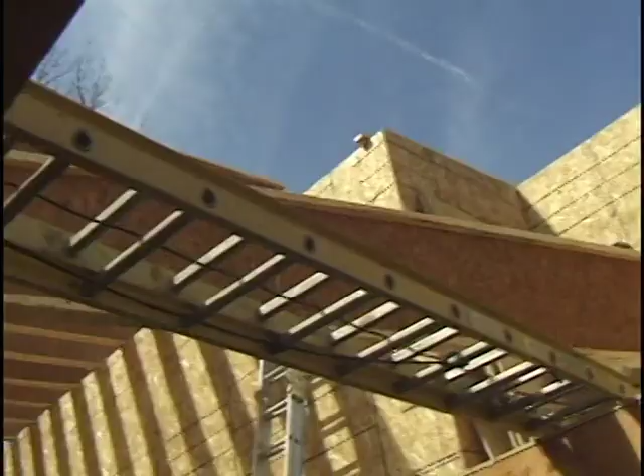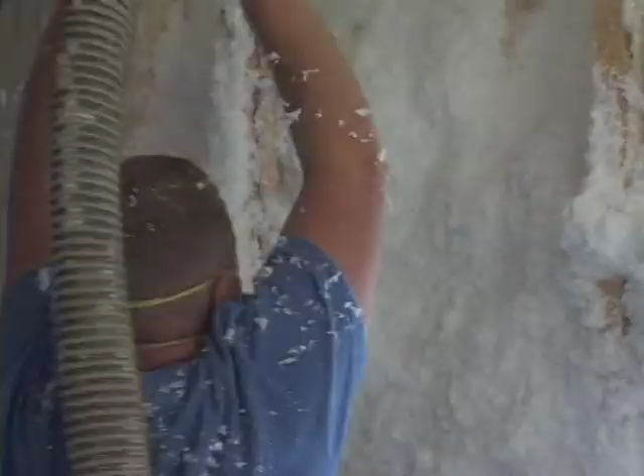The story of a new way to build that uses 80 to 90% less heating and cooling energy. It's called Passivhaus because the buildings are so well insulated and airtight that they don't require an active heating system, like a forced air furnace or a heat pump. This house is going to cost $100 a year to heat and cool. I think that's a pretty powerful statement.

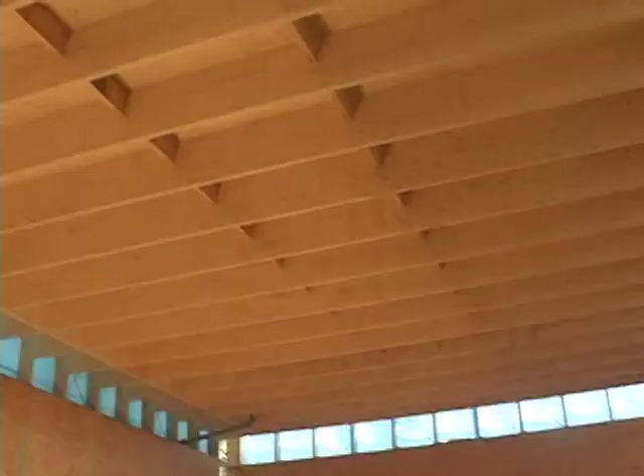This technology was invented in North America during the first energy crisis by innovative people who were trying to make significant cuts in energy use. A famous physicist named William Shurcliff very early saw that the hugest potential is just in using the energy we have much more efficiently. Today, our problems are much more serious than they were in the 70s and 80s. Climate scientists tell us that we must cut our CO2 emissions 80% by 2050 to help stabilize the planet's climate. And that means drastically cutting our energy use.

There is a deep analysis of the International Energy Agency about the current situation, and they just state that the current energy situation in the world is blatantly unsustainable. We absolutely need to transform the way we use energy.

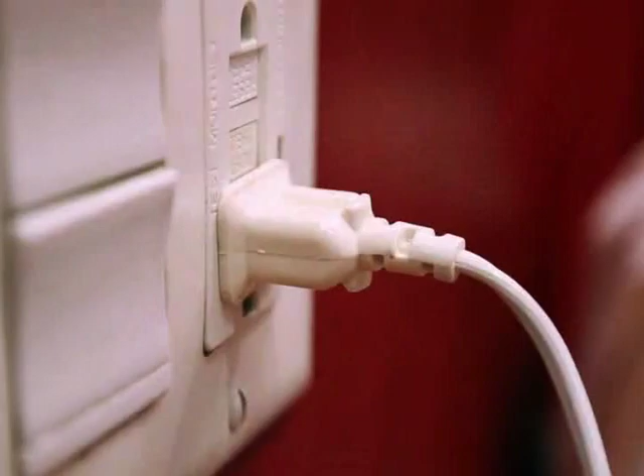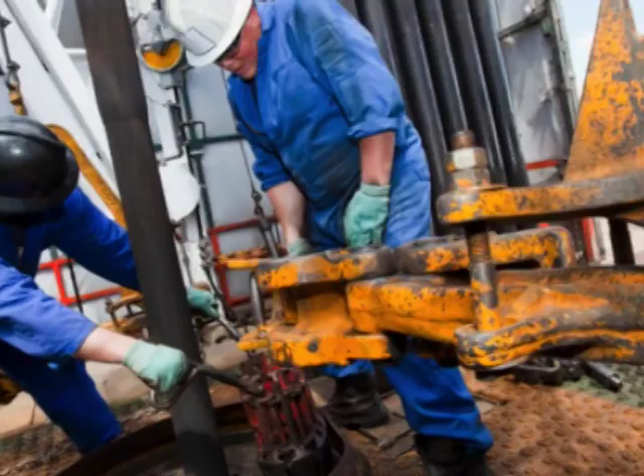What happens when you pass that peak and you change the relationship of supply and demand, and you're on the downhill slope? The fact that we are going to the limits of fracking to get shale oil out of North Dakota and Texas, that we're performing mining operations in Canada to dig out oil sands and process them with natural gas inputs to make a liquid fuel. These are signs that we are really hitting scarcity.

The CO2 emissions that we're personally responsible for don't just go away, they're actually accumulating. The notion that I was, just through casual energy use, producing CO2 that will still be there in 25 years and 50 years, that my grandkids will be dealing with the stuff that I just casually put out there. We will need to know how, by the middle of the century, to reduce carbon emissions by 80 or 90%.

We're able to tell now, I think 2010 was the warmest year on record. If the worst case occurs, then large parts of the planet may be uninhabitable. We may have flooding on the coast.

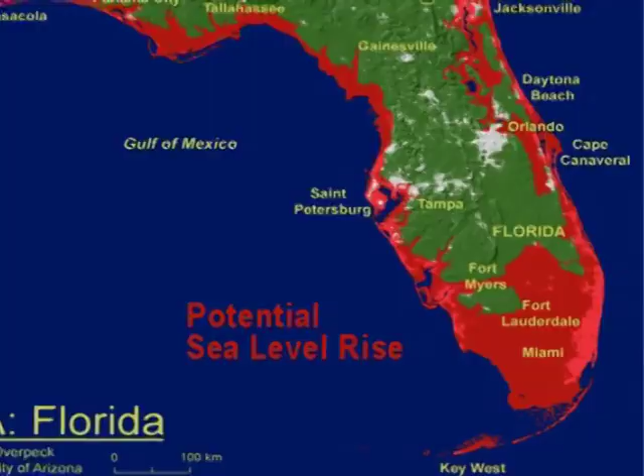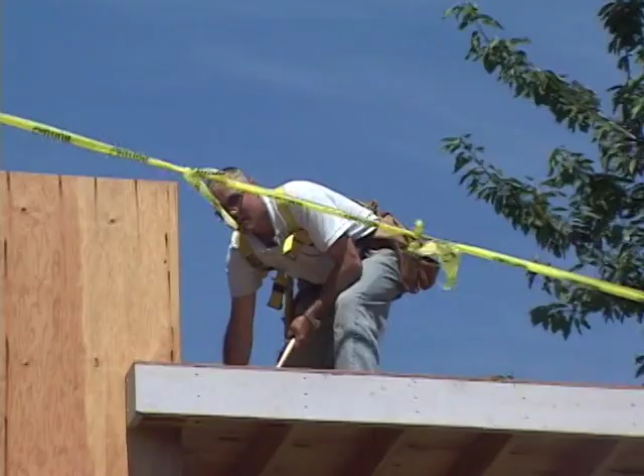It's going to require an effort that's certainly equivalent to what we would call a wartime effort. And it's going to require the citizenry to accept that this is very important and really see this as a survival question. And we have to change it quite quickly. In energy terms, quite quickly means in the next 20 to 30 years. 20 to 30 years is a short time compared with the development of buildings, compared with the development of power plants. The International Energy Agency speaks about an energy revolution as what is needed.

Our housing designs in the U.S. rely on power, electricity, and the burning of fossil fuels. If we did not have easy, uninterrupted access to these fossil fuels, I think a lot of our housing would not serve its main purpose, which is to shelter people. Almost 50% of our CO2 in the United States is generated from buildings, either from building them, tearing them down, or living in them. Buildings generate more CO2 than cars, trucks, and airplanes, and once constructed, last many more decades.

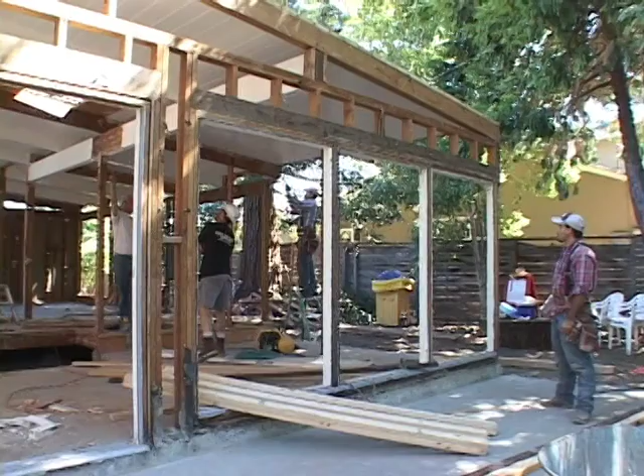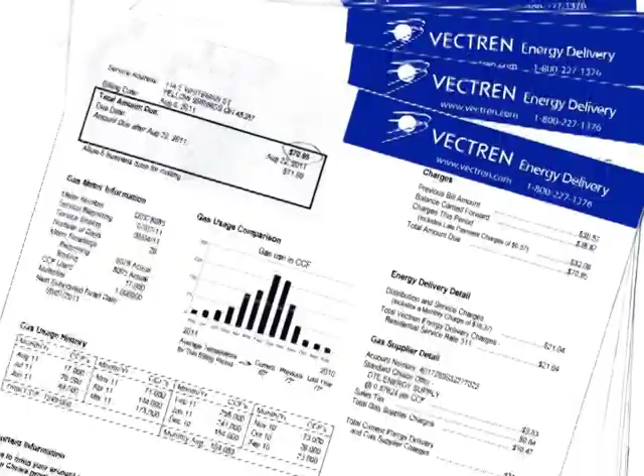The longer it takes us to realize that we have no alternative to making huge improvements in how we build, the less time we will have to do a good job in that transition. Forget about points, forget about green ratings. How much energy did the building use last year? Let's look at the utility bills. As soon as last year's energy bills for a building become a normal part of a real estate broker's listing, people will have a tremendous financial incentive to make their buildings energy efficient.

There was a very early development of energy efficient architecture in the 70s. In America there were a lot of good examples showing that you can have a better efficiency of, say, a factor 3, a factor 4, and that there are almost no limits on how high the efficiency can be. The first super insulation projects came out of Champaign-Urbana, out of the Small Homes Council. Wayne Schick apparently coined the term super insulation. These developments ended somewhere around the mid 80s. It was very difficult to understand why these developments stopped.

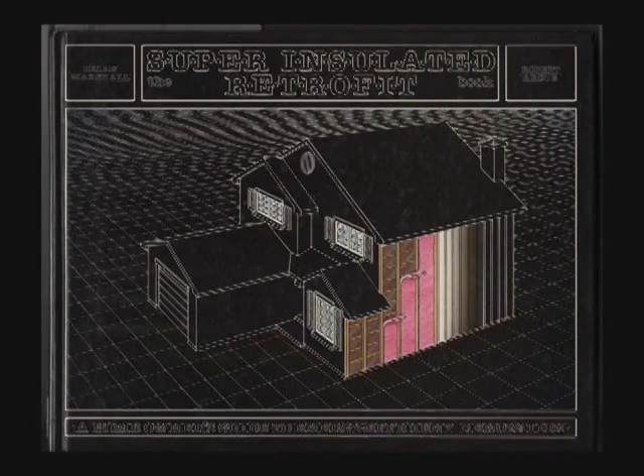And that's when, in Germany, Dr. Feist and Professor Bo Adamson went ahead and studied all these concepts. They had studied William Shurcliff, they had studied all the early super insulation books, they had studied Amory Lovins's work. They took the whole thing and really engineered it from top to bottom. We really proved that this strategy is successful. In 2003, Katrin Klingenberg built the first prototype passive house in the U.S. in Urbana, Illinois.

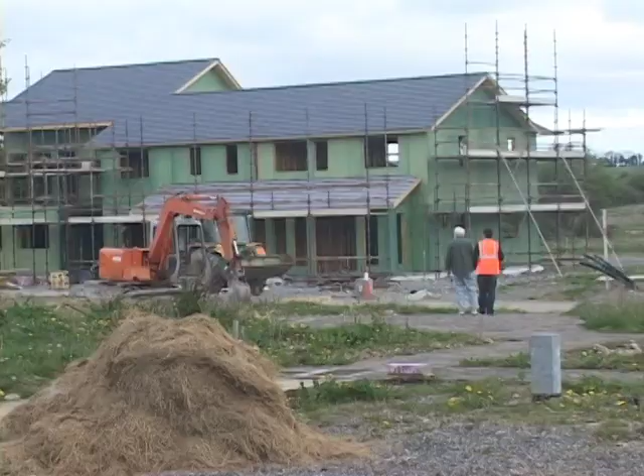Kat and builder Mike Kernagis then began the Passive House Institute U.S. Europe has been setting an incredible example in terms of making subsidies available, understanding that also this new building sector is creating jobs, putting new codes in place that require building construction to comply with Passive House standard. And the European Parliament has put into place an action plan that is working towards making Passive House standard code for the entire European Union by 2015.

Europeans and people living in other developed countries generate less than half the CO2 each year as people in North America. Traditionally, Europeans live in smaller houses, but there is also a growing commitment to renewable energy and the passive house as the building standard. What is not so well known is that you can reduce it not just by 10% or 20%, but you can reduce it by 80% and 90%. So this is a real solution available.

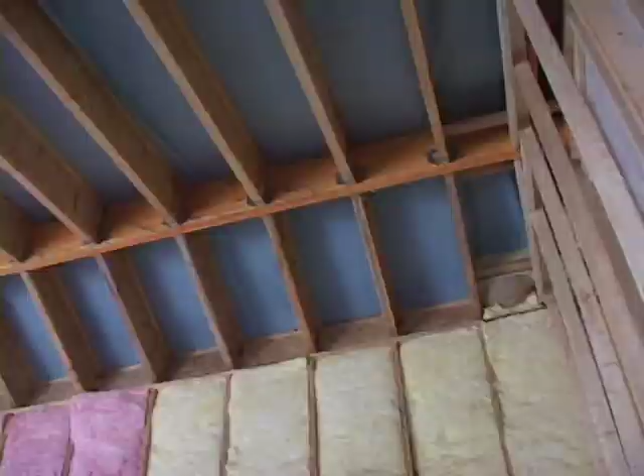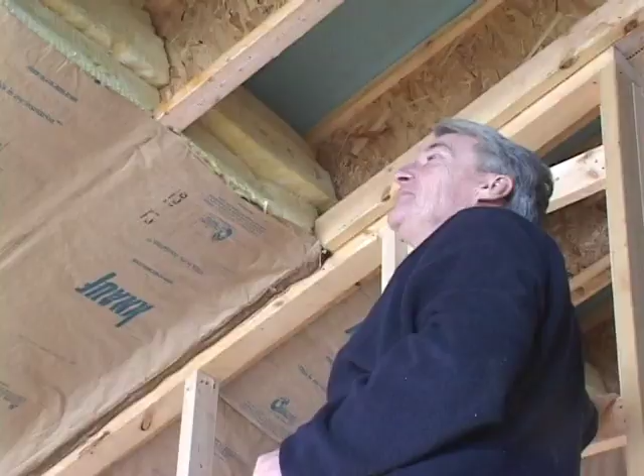This building standard is achieved by making the entire building envelope, the walls, floor, and ceiling, thicker than usual, so it can hold more insulation. So we're using I-joists that are 16 inches deep. So in the 16 inches, we can put in 3 layers of this high-density fiberglass. Holes where wires, plumbing, and vent pipes enter the building are sealed, and the house is made as airtight as possible.

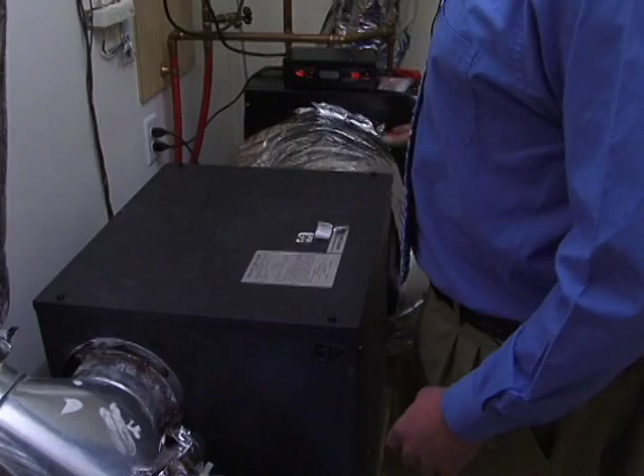Heat or energy recovery ventilators are used to provide fresh air, transferring heat from the exhaust air to the fresh air entering the building. We have the air coming in that's cold from outside, and then we have the warm air on this side coming from the house, extracted from the kitchen. The constant ventilation ensures good indoor air quality.

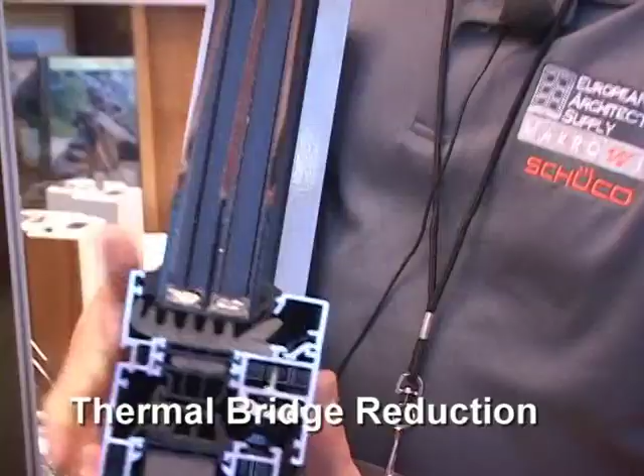High-performance doors and windows are also installed. Such windows are typically triple-paned and filled with argon or krypton gas. This is a Passive House certified window. The thermal break in between is really the key to stopping the energy transfer from the exterior to the interior or vice versa. All material conducts energy, some more slowly than others.

For example, metal and brick conduct energy more easily than wood, which is a better conductor than insulation. Thus, a metal window frame, or a solid framing member in a wall, becomes a thermal conductor of heat or cold between the inside of the building and the outside. In a normal building, this would usually be a thermal bridge where you have a transfer of masonry through the building into another masonry wall.

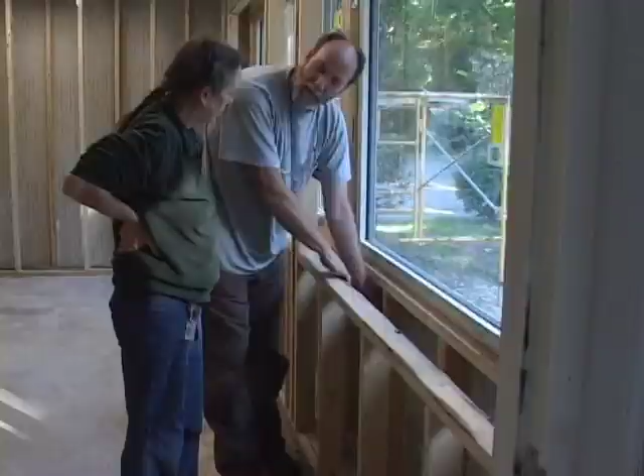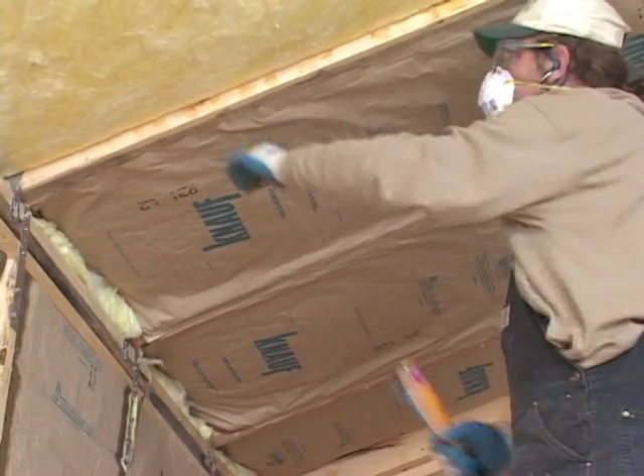This stone is a skin. There's lots and lots of insulation back there. So we've reached this traditional look with extremely modern energy efficiency. And if you calculate the heat loss... The misconception that the public has is that there's going to be one thing that changes the way that we do it. Each area is going to have a small savings, and added all together, it's going to be a very large savings.

The term passive house refers to buildings that are so well insulated and sealed that they no longer need a conventional heating and cooling system. Passive house construction is different than passive solar. Passive solar buildings were designed to collect energy from the sun using large areas of south-facing glass, often causing overheating during the day and cooling off at night.

Instead, during the winter, passive house buildings rely on keeping in the heat that is naturally present in a building from the sun, people, TVs, computers, and other appliances. And in the summer, south-facing windows are either shuttered or shaded to eliminate solar heat gain, greatly reducing the need for cooling.

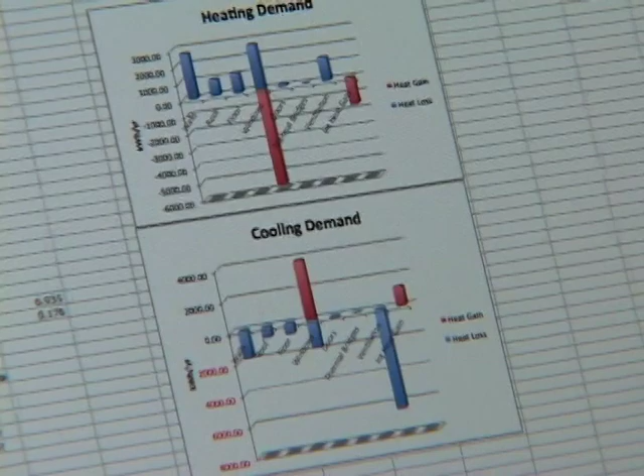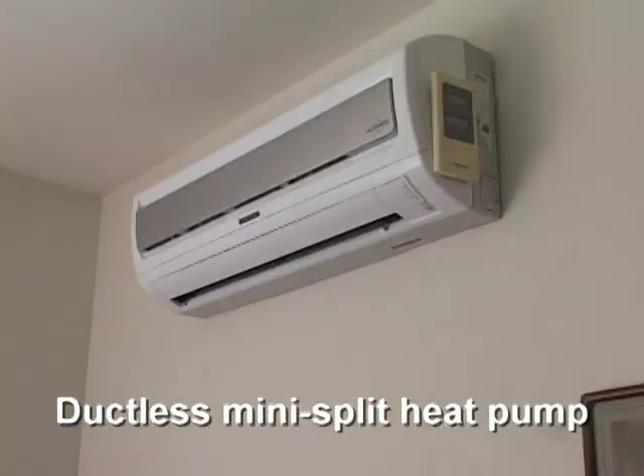Solar orientation is really important when you are working with the Passive House planning package and trying to achieve a passive house. It shows you on a couple of different spreadsheets how much of your heating demand is going to be met by the sun and how much of it you then have to make up for with mechanical means. In most climates, all a passive house needs is a small backup heating or air conditioning system, such as a mini-split heat pump, for extremes of hot and cold weather.

The Passive House standard requires that buildings use no more than 15 kilowatt hours per square meter of living space per year for heating and cooling. 15 kilowatts is similar to the amount of energy used by a hairdryer or a small space heater.

Building very low energy buildings requires the use of energy modeling software. The heart of the design process with Passive House is using the Passive House Planning Package, or PHPP, that was developed by the Passive House Institute in Germany, that allows you to do energy modeling of the building and also is quite good for optimization and design.

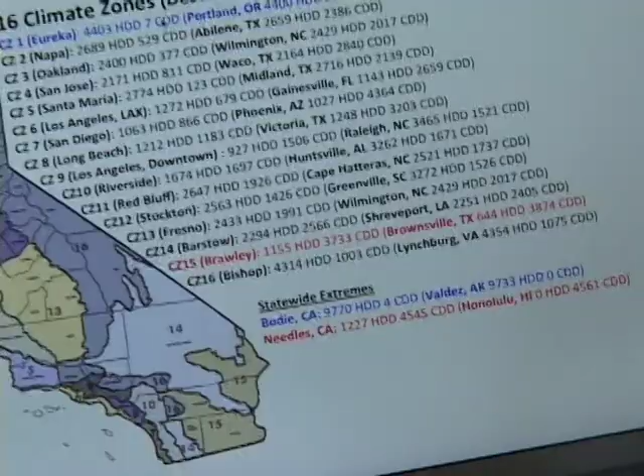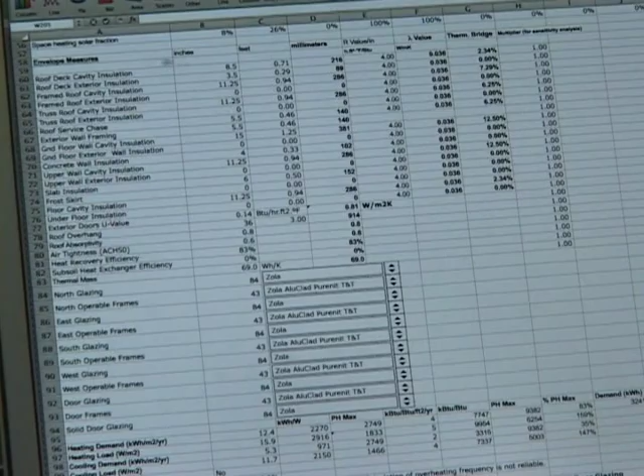The Passive House Institute generates climate data files for specific locations. But it's very nice because it dials it in quite tightly. This is kind of where I do most of my design work. These are the particular envelope measures. These are the inputs, and these are the results coming back from PHPP.

So for instance, the air tightness right now is set at 0.6, which is the maximum allowable for a passive house, and my annual heating demand is 12.4. If I change that to 6, which would be typical air leakage for a standard house built in the U.S., it goes up to 49.2. So a major difference just from that air tightness. I think it's a very good verification tool. You put a building in here and it gives you what's been field tested to be a fairly accurate result.

Green building is something that began in the 1990s. There were over 100 different green rating systems around the country. But energy wasn't as important at that time as it is today. If you could get a 10 to 15% improvement, you were happy. Now we're learning today that those green buildings of the past are not too much different than conventional buildings when you have to reach an 80% reduction.

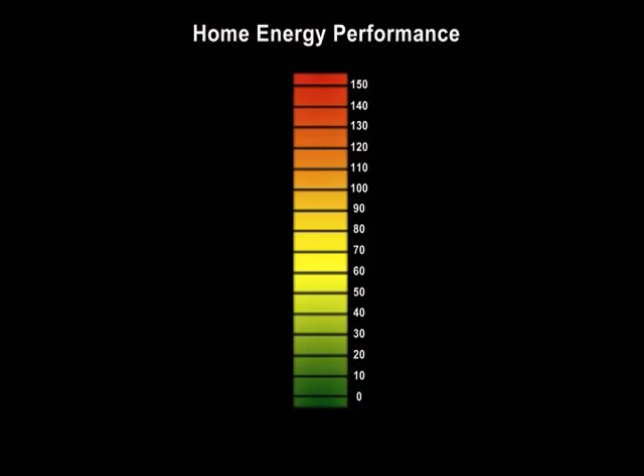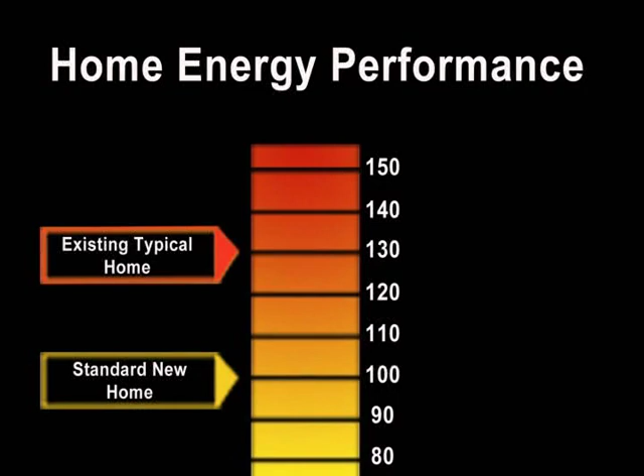If we take a look at the energy performance of buildings in the U.S., the number 100 represents the current U.S. building code. Existing homes, most of the 113 million houses and apartments in the United States, are at the top of the chart. They typically use 30% more energy than a new home built to code. The EPA's Energy Star standard for a new home, at 85, uses 15% less energy than the average new home. The U.S. Green Building Council's LEED program begins with the same energy goals as Energy Star. Some of its higher ratings use less energy.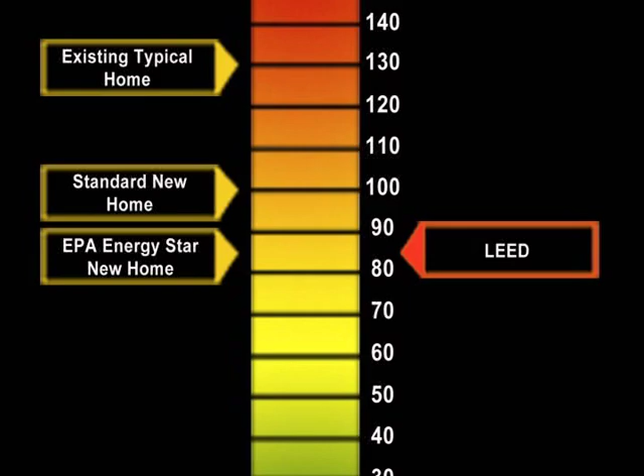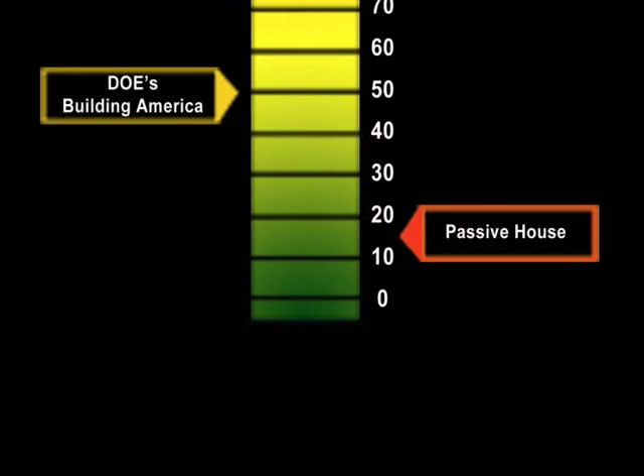The Department of Energy's Building America program reduces home energy use by 40 to 50%. At 15, Passive House is the only building standard that cuts energy use by the amount needed to meet CO2 reduction goals. Once this level of energy savings is met, homes with solar panels can more easily achieve a rating of 0. As we're seeing fossil fuels being depleted, we're going to see energy costs skyrocketing, and as that happens, people living in passive homes are going to be protected from that. They're going to still have a low energy bill no matter what the units of energy cost.

There are 3 ways to use life cycle analysis on a building. First is to use it to evaluate the energy consumption, secondly the CO2 generation, and third the building costs, both the initial cost and then the operating costs. And I've seen Europeans looking at the life cycle of a building, how you build a building off-site and on-site and the impact and the waste that it does. Then you get to the point where you're in the house operating it, where passive house then becomes really important. Then there is the demolition of a building and the recycling of a building.

The first step in life cycle analysis is to look at the embodied energy, and that's the energy to construct the building. The second aspect is the recurring embodied energy, because those materials wear out and have to be replaced. So you have a small amount of recurring energy that's taking place throughout the lifetime of the building. Third is the operating energy that begins the day the occupant moves in, and that operates continuously until the building is no longer being used. And that's principally for heating, cooling, appliances, entertainment, all the plug-in loads, as some people call them.

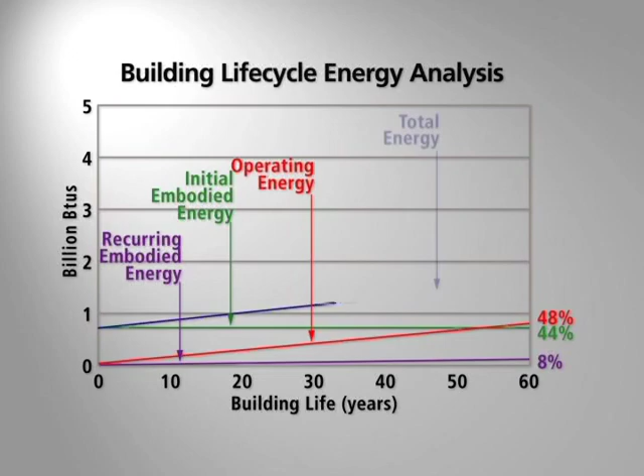Combined, these represent the total energy use of a building. But if the initial embodied energy is increased during construction to meet the passive house standard, you greatly reduce the operating energy the building will use, and also the total energy used over the life of the building.

Doing life cycle analysis on cost is different than doing it on energy. Passive house and the conventional house will be roughly the same in monthly payments. The mortgage payment will be higher for the passive house, while the utility bills will be lower, and it'll be roughly a wash. But that's for the first 30 years. After that, suddenly there's a huge bonus because you paid off the mortgage, but if you have high utility bills, you don't see much savings. With the passive house, you'll see savings which over the lifetime will add up to tens of thousands of dollars.

We're told now by all our governments that we have to reduce our CO2 emissions 80% by 2050. So we need to know the CO2 emissions of a house. And when you look at the CO2 emissions of a passive house, it does actually meet that 80% reduction today. Over 60 years, the CO2 emissions of a passive house are nearly 1 million pounds less than what is used by a standard home, or even by homes classified as green.

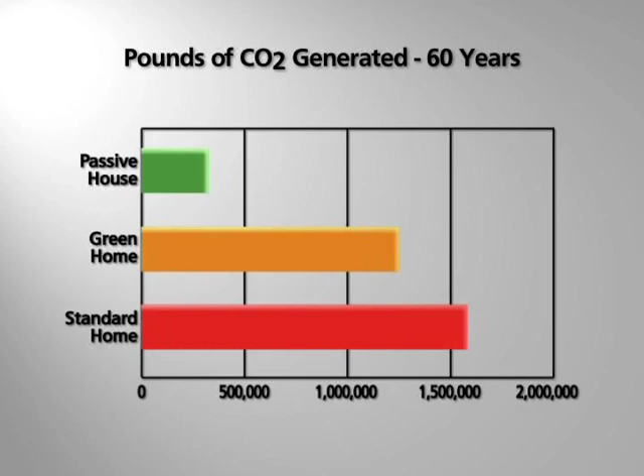Understanding the building, insulating it well, air sealing it, giving it a good mechanical system, and all these things in new construction can cost the same or less. And then we have the problem of all the existing buildings that need to have the reductions done.

I've wanted to do environmental construction for a long time. We felt that the U.S. Green Building Council LEED program was filling a niche, but we wanted to do something that was really ahead of the curve and was an exemplary project. Passive house really is a cutting-edge energy standard, and if people are concerned about global warming, buildings use, we've heard the numbers before, 40% or whatever it is of the energy use in the country.

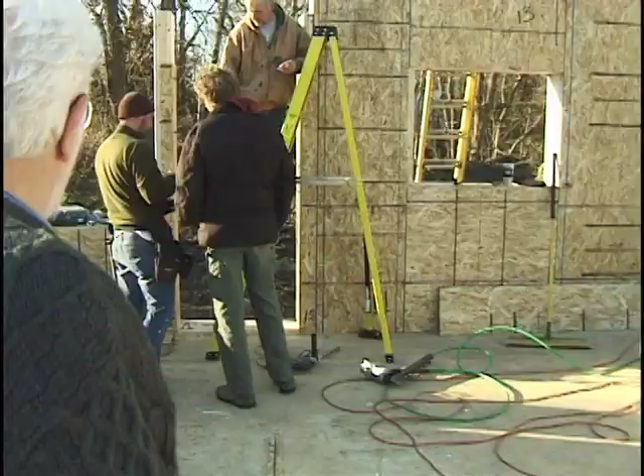And so I wanted to try to build an example here in Yellow Springs, Ohio, to show that this is possible, that we can actually make a dent in something like that. And this house is going to cost $100 a year to heat and cool. I think that's a pretty powerful statement.

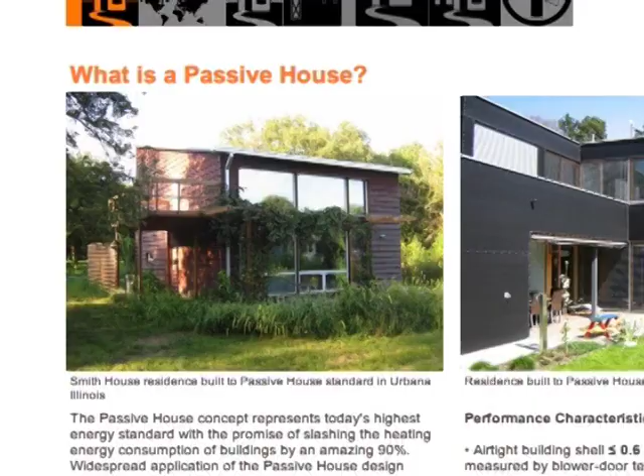In about the year 2000, I became aware of Passive House as an approach to design, and I literally stumbled on it using search engines, looking for things like low energy housing, design, passive heating and cooling, and this thing came up that said, what is a passive house? And I clicked on it, and I ended up at the Passive House Institute website and devoured the whole website and thought, this is exactly what I have been aiming to do.

This is the first retrofit in the country to be certified to passive house levels. When we went into it, we just didn't know if it was going to work. The architect and I traveled to Germany, saw what they were doing there, and realized very quickly that America needs to pick up its game on energy efficiency. Over there, they've been dealing with these buildings for 20 years. The nice thing is they've made lots of mistakes, and we can learn from it.

One of the concerns people have when they hear about passive house, is it going to look different? Is it going to operate different? And the only things I would say is it'll look the same and operate better.

I designed this house and built this house 12 years ago, and it felt somehow vaguely dishonest to just leave it as a regular old, as Captain Mike would say, a dinosaur house. I want it to last forever and be enjoyed and used as shelter forever.

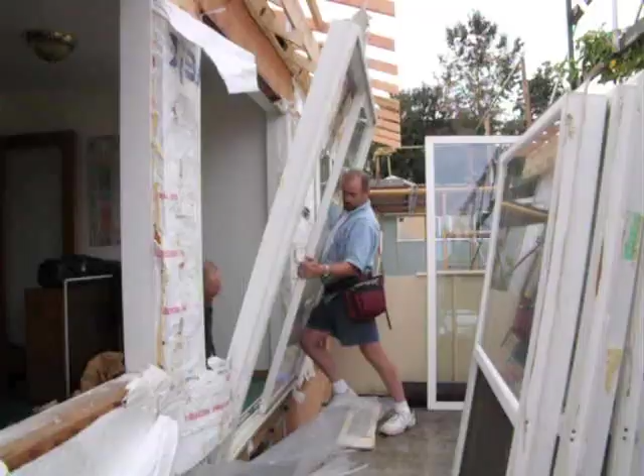I'm very energy conscious and been involved in a lot of energy issues. I lived in Minnesota before I moved here. Was involved in many energy activities up there. And so I'm conscious of the concern about peak oil and climate change and being more efficient in our lifestyles, reducing our carbon footprint. So I've decided to retrofit this house to come as close as possible to passive house standards.

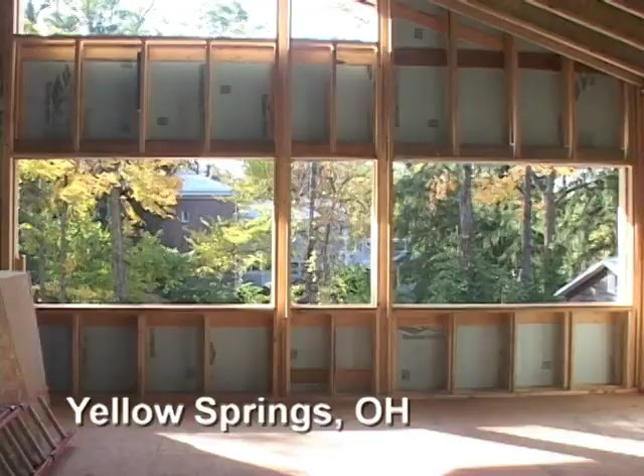The most important part of that revolution is increased efficiency. There are a lot of possibilities with very high costs, like building new nuclear plants, but the reduction of the existing energy losses, this is a low-cost concept.

This house is the first house that I attempted to get to Passivhaus standards. We began this project with the goal of building a very sustainable single-family dwelling that would be durable and last for hundreds of years. This was the stated goal of the homeowner. Because we had lived in all these old, just wonderful, beautiful, character-laden homes that leaked like sieves. And there's nothing wrong with feeling warm in the middle of winter when you live in Ohio.

But what we tried to use as a major goal was what we call passive survivability, that this house could keep its occupants warm and safe, healthy, and comfortable with a minimum of external energy input other than that which the sun gives us. We started out knowing we were going to do some sort of energy efficiency. And then along the way we decided, well, how energy efficient could we go?

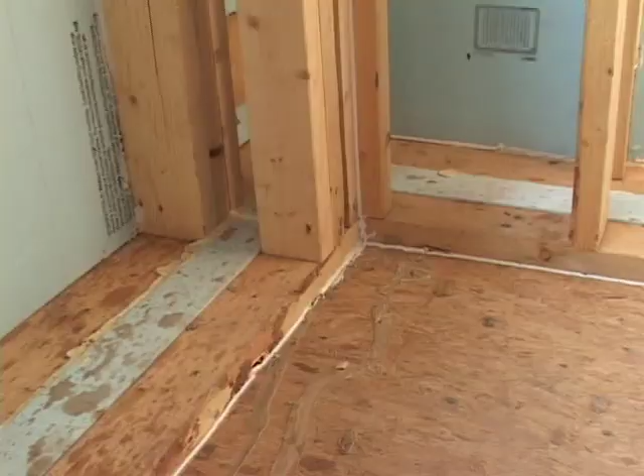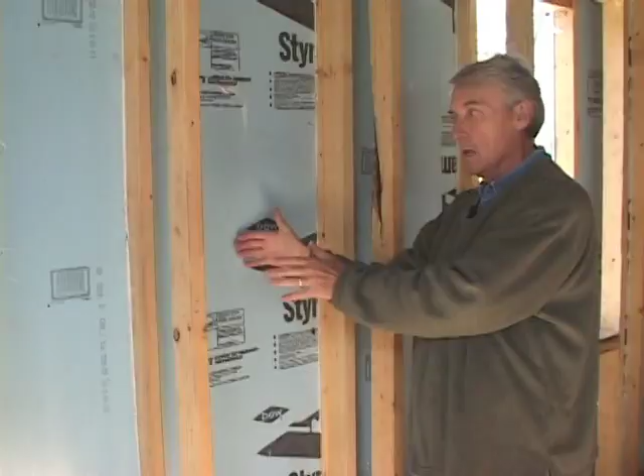So the walls of this house, of the framed portion of the house, are framed with 2 sets of wood stud walls, what we call double stud walls. So on the outside, there's a stud wall. On the inside, right here, there's a stud wall. And in between is an empty cavity. And the whole thing, 14 inches deep, is filled with dense packed cellulose insulation. We'll have 2 layers of R21 making R42, and then R5 in this 1-inch of styrofoam, which will make a total of R47.

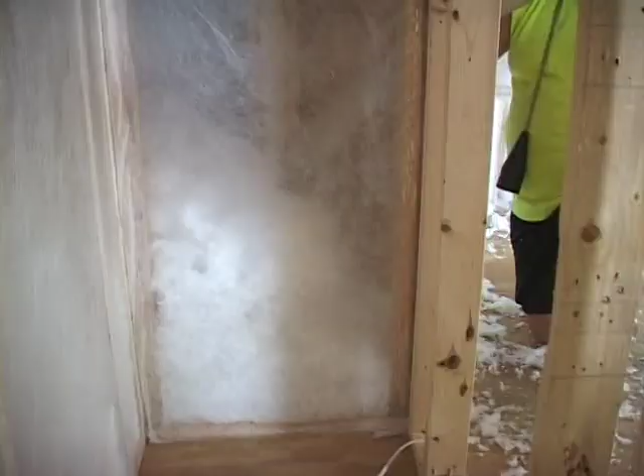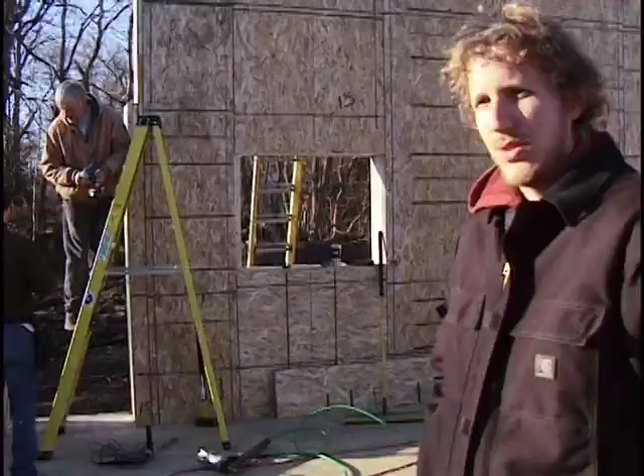A Passivhaus envelope is super insulated and air sealed. Floor, ceiling, and exterior walls. And high R-value doors and windows are also used. Triple glazed units, R-value of about 9. The doors tilt and turn. People can use blown-in fiberglass or cellulose, insulating batts, or foam. The Passivhaus standard does not tell you what to use, just the specification you must meet. To the extent of the research we've done, we think this is the very first Passivhaus built in Ohio.

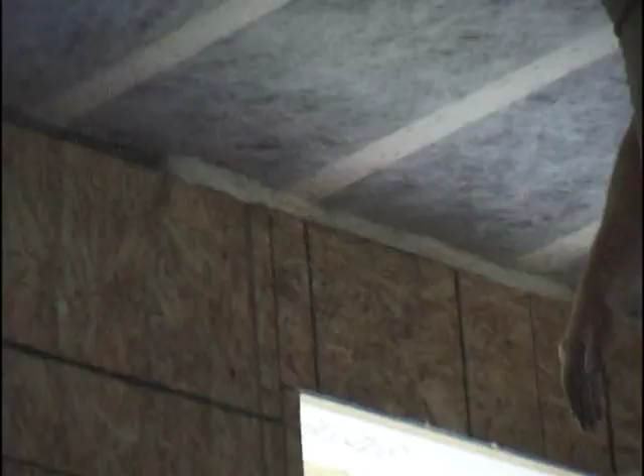The walls are 14 inches thick, so the walls are going to be an R60. The floor is R70, and the roof is going to be R100. The insulation in the floor is the same as what will be in the roof, which is a blown-in fiberglass insulation called spider insulation, and it's packed in very tightly at a 1.8 pounds per cubic foot density. The underside of the roof is going to be, in the ceiling side, a layer of OSB, and we're going to make that our air and vapor barrier.

These are, of course, south-facing windows, so they have a very high solar heat gain coefficient, meaning they let a lot of infrared heat into the room. When we installed them, we had to be just, of course, incredibly careful with respect to air sealing around the perimeter of them, such that we achieve the rigorous Passivhaus air leakage standard.

Air sealing is labor. And it's odd because, in a way, air sealing is one of the most important factors in building an energy-efficient house. We can lose 1/3 or more of the heat from a house simply through air leakage. You can have the best windows, you can have the best insulation. If the exterior shell of the building is leaky and either losing air or letting cold air in, your efforts are semi-useless.

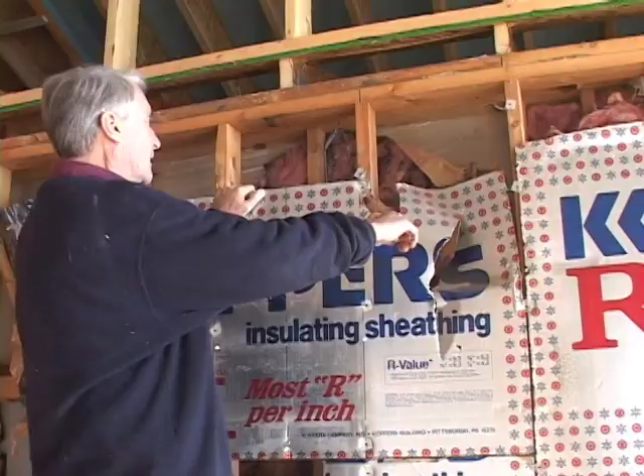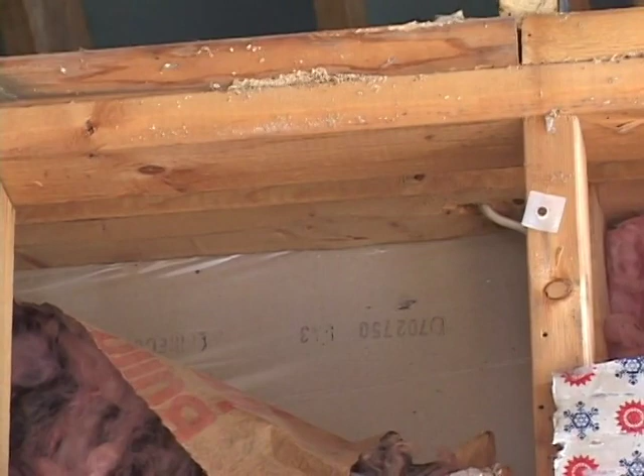Here's a wall that was built about 25 years ago, and it illustrates some of the problems that we weren't aware of at that time. The hole was drilled about 1 inch in diameter, and a single wire is run through it. There's no caulking, there's nothing really to stop cold air moving down from the attic or warm air that might be in the stud cavity moving upward.

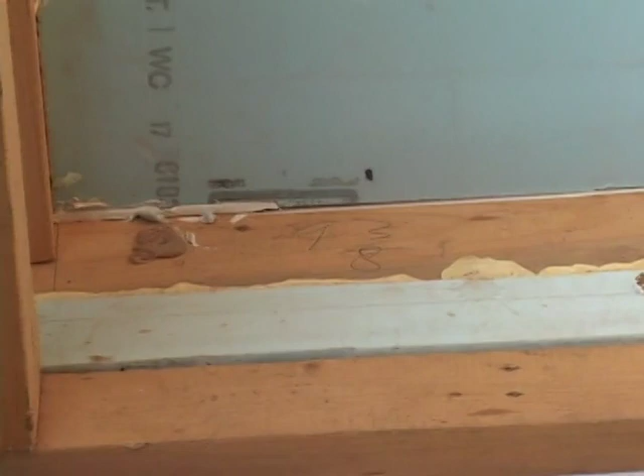You see that we've actually used caulking to seal both the outer wall and the inner wall. And we've used foam where foam was appropriate to fill any potential voids. This kind of attention to detail can make a tremendous amount of difference in the actual performance of this building.

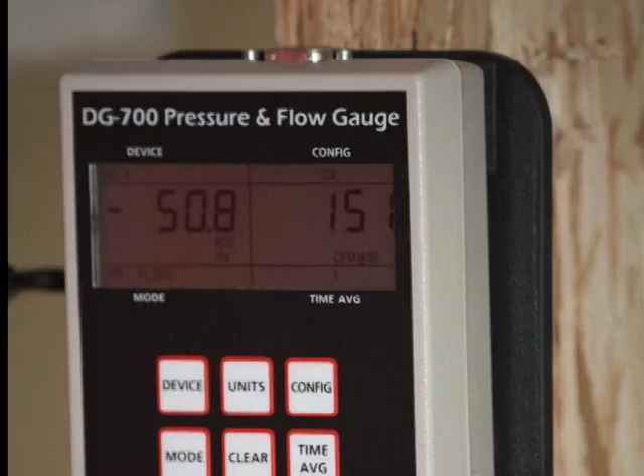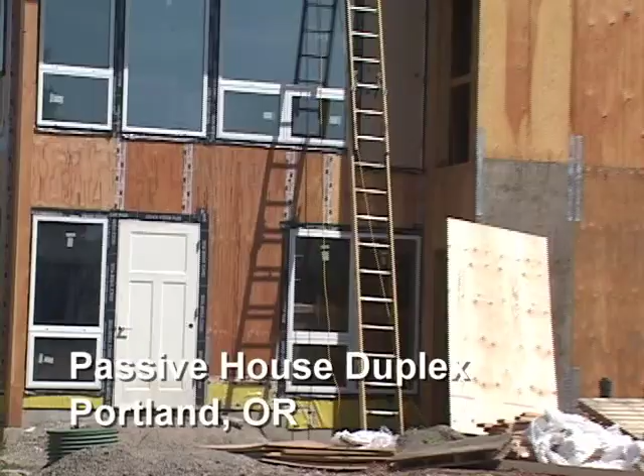The electric grid was turned off and this house had no power. If it was the dead of winter, if the sun was shining, this house would stay warm enough to be comfortable without a conventional heating system, without electricity. It's the only building standard that's actually testing people on air tightness. And you see incredible gains with air tightness.

When I started with Passivhaus, most of the builders around here told me that it couldn't be done. The thing is we did it. The first day that we had this house blower door tested, I was incredibly nervous. And it turned out to be a non-event.

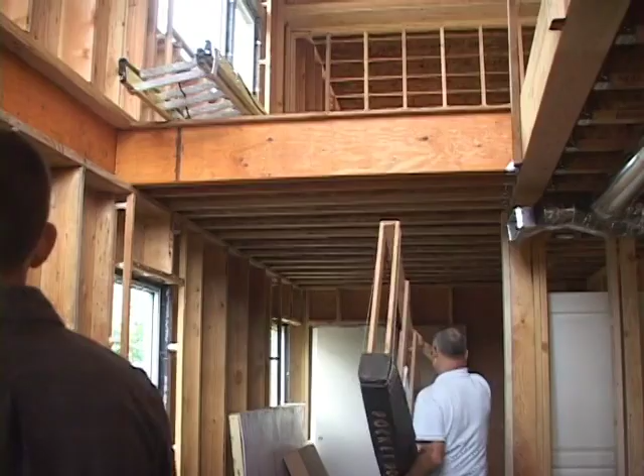There's no way we're going to meet the energy goals that we have without upping our game in the U.S. construction market as far as air tightness. The best idea is to do the very best you can, and that's not a 15% reduction in energy, it's an 80 or 90% reduction in energy, and that is possible.

When we build very tight houses, in order to maintain indoor air quality and keep our occupants healthy and the house healthy, we need to provide what's called whole house mechanical ventilation. That means we control the fresh air coming in and we control exhausting the stale air going out, and we balance that. We've simply calculated the amount of fresh air needed in a continuous flow to keep the occupants healthy, and we bring in that much air and exhaust out that much air at the same time to keep the house in balance.

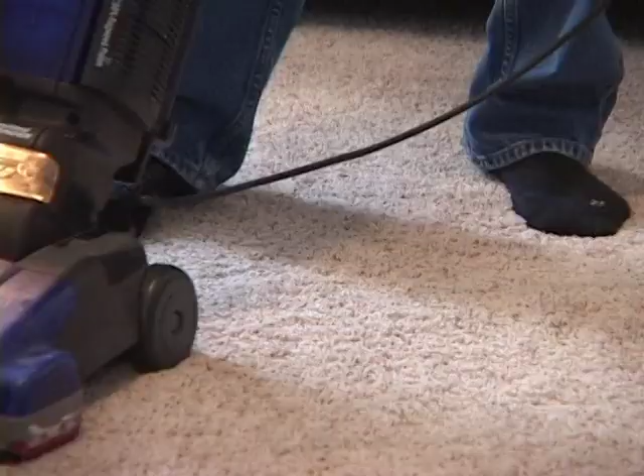When you have a modern house in which you've made the walls and ceilings so tight, you, of course, make the air stale just by living inside the house. There are also some materials that are sometimes used in a house or brought into a house. A lot of the furniture that's made today is made with a form of chipboard where the glue of that chipboard does what they call outgas, and it puts some pollutants into the air. Carpeting can do the same thing. So because any of these things exist, and because we use up the air in a house, we need to be sure that the right amount of air is there. They say about 10 cubic feet a minute per person is a good standard.

The fresh air then goes through the ducts to primarily the bedrooms and the living spaces. And then the yellow ducts, the return air is brought out of the bathrooms, kitchen, moist areas, and returned and gone out. So it's an entire house system to move fresh air through the house from the living spaces and bedrooms to the bathrooms, kitchen, and out.

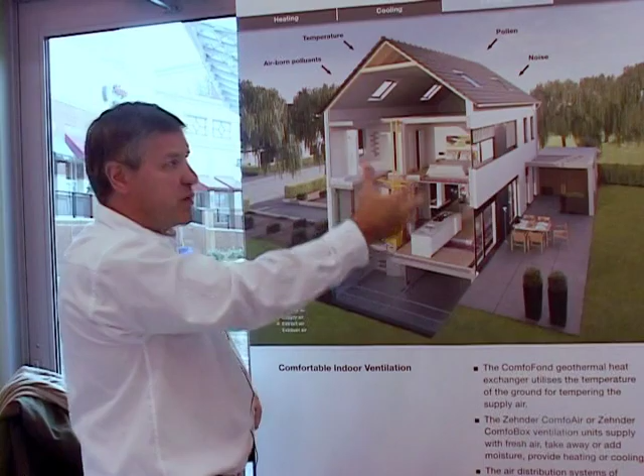Why are you taking it out? Because everyone likes to see it. Oh. This is the magic device?

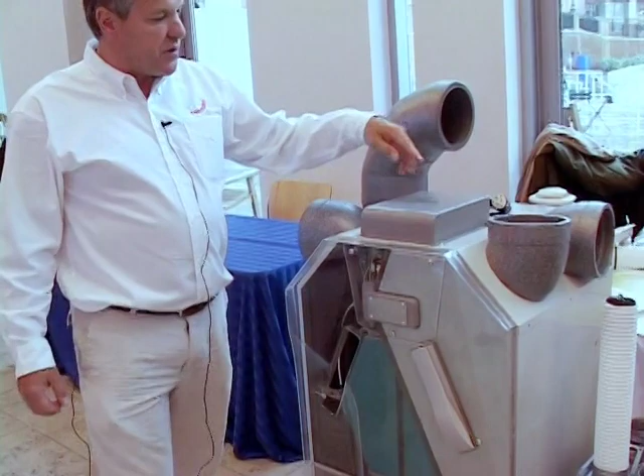Yeah, that's a heat recovery core. This is a heat recovery ventilator. What you've got is your supply air would come in on this side. It passes down into here, and this piece here is a heat recovery core. And the fresh air, the cold air in the wintertime, would pass in this way. On the backside from this duct, the air from the bathrooms and kitchen passes through in another direction.

This core here is made of layers so that the air doesn't mix. It passes through these multiple layers in opposite directions. What happens is warm air is coming in one side and cold air going the other. They pass through on either side of these membranes and transfer that heat from one to the other. So by the time the air comes in, over 90% of that heat difference is transferred.

We will not have the same effect that you would have with a forced air furnace, temperature differentials very quickly, like from cold to high. We will not have any drafts, we will not have any noise, we will not have any dust in a passive house, because everything is such low flow, so steady. Temperature in a passive house stays completely steady.

People think because we don't have a furnace that we're going to be freezing through the wintertime, and it's a lot more comfortable than a normal standard house. You don't have the drafts coming through, and I never have to even think about wearing slippers because the floors are always warm.

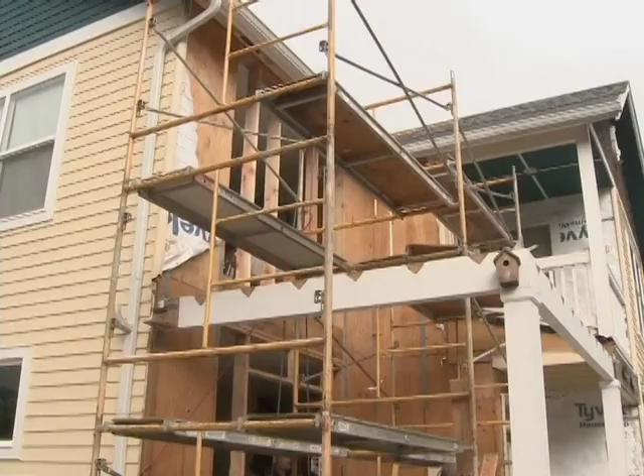And then when he came home last December, around Christmas, and said, "I'm going to do our house," what I finally started to say is, well, somebody has to go first. This house at 2,100 square feet is just slightly smaller than the national average.

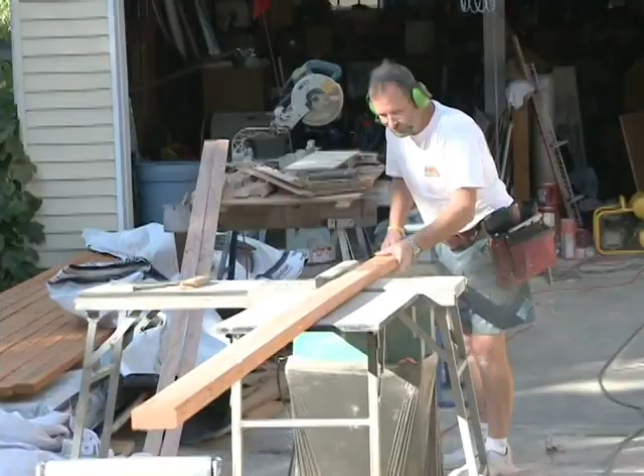Many millions of houses have been built in the 70s and 80s and 90s with relatively modern energy codes. So our house had double glazed vinyl frame windows. We had 6 inches of insulation in 2x6 walls. So that's all fairly conventional, and we basically added to that.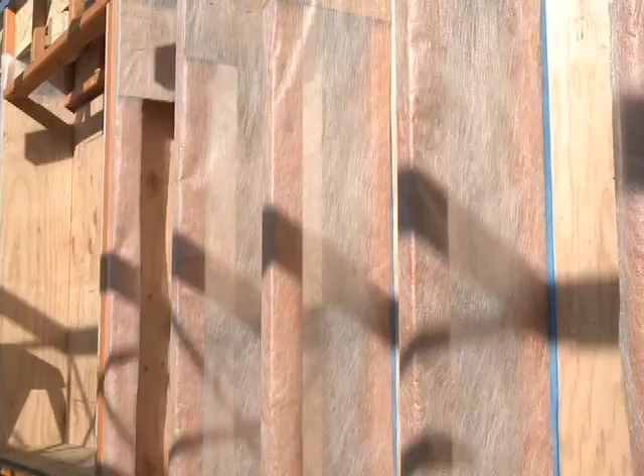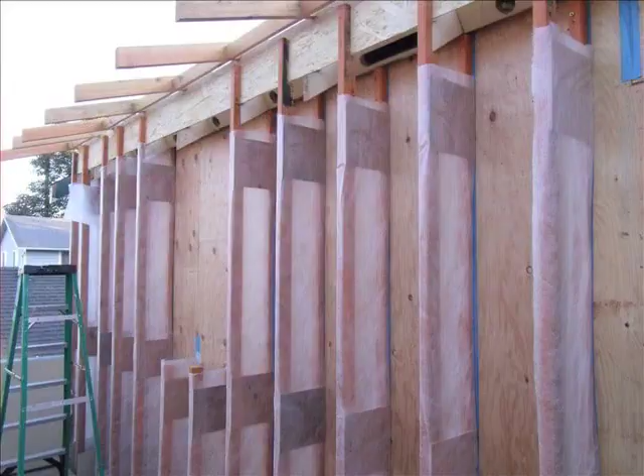In deep energy retrofitting, walls are either thickened to the outside or to the inside to hold more insulation. Tad Everhart used Larsen trusses to thicken the walls of his home. The truss is attached to the existing building on the outside. This wall used to end right here, and now it comes out another 10 inches. And that insulation is 100% high density cellulose that was blown in from the top. So these Larsen trusses go all the way from the mud sill to the top plate of the second floor.

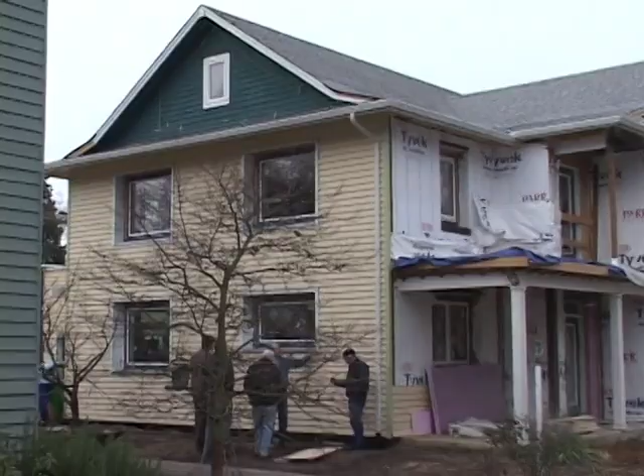These are the workhorse windows of the house because these bring in a great amount of heat on clear days. Those windows don't open anymore, but to make up for it, we've got our operable windows on the west side of the house and the east side of the house. So in the summer, when we want to go with natural ventilation, we can open those windows and we can get a nice flow-through ventilation from the west to the east.

Got a moment to answer a question?

What we've noticed already is the house is more comfortable, and it's very stable, so we don't have these big temperature swings. We constantly have fresh air coming into the house, and we love that. It's wonderful to go up and put your hand on the register and know that instead of just old air that's gone through the furnace and come back for another cycle through the house, it actually was outside 30 seconds ago. You've recovered the heat from the stale exhaust air, put it into the fresh incoming air, and you're breathing air just as if you were outside.

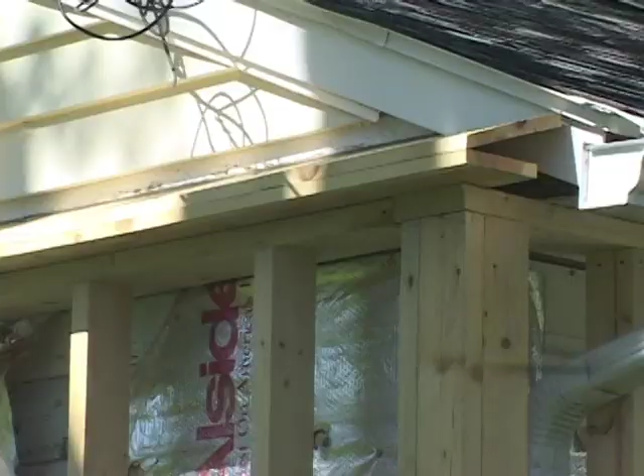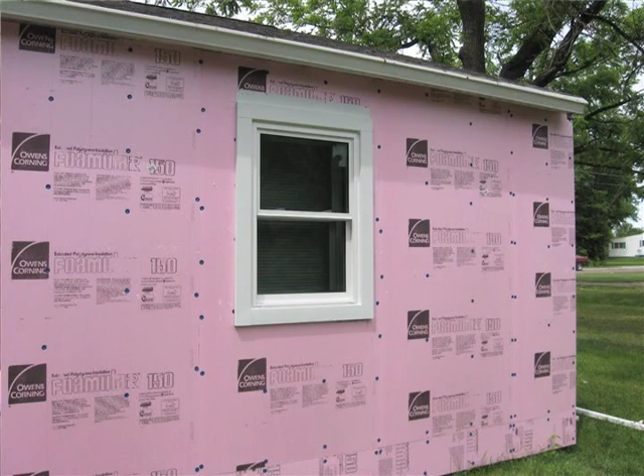I purchased this house in August of last year. The house is 560 square foot living space. My cousin, who is a building contractor, has built the walls out, which allowed for the expansion of the walls 9 inches, which now allows us to put in 2 R15 fiberglass insulation, which is R30, plus a 2-inch foam board, which is another R10. This is added onto the insulation that was in the basic house of blown-in cellulose, which we estimate at about R10. So our estimate is that the final wall insulation will be roughly R50.

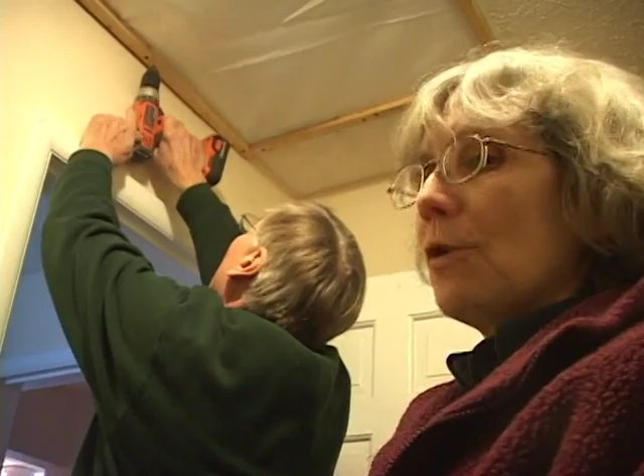The insulation that we've added to the floor of the house from the crawl space is R40. There was originally cellulose insulation between the attic joists. We blew on top of that another 20 inches of blown-in cellulose. There's 7 windows in the house. We replaced all of them with triple glazed windows. We took out one door, it was not a well-insulated door, and there was a lot of cold coming through that door.

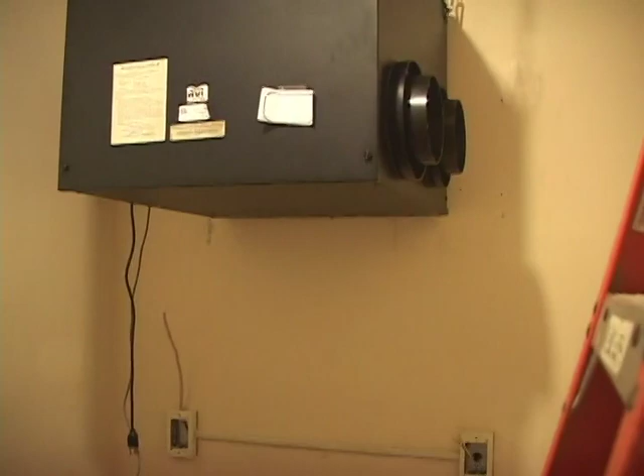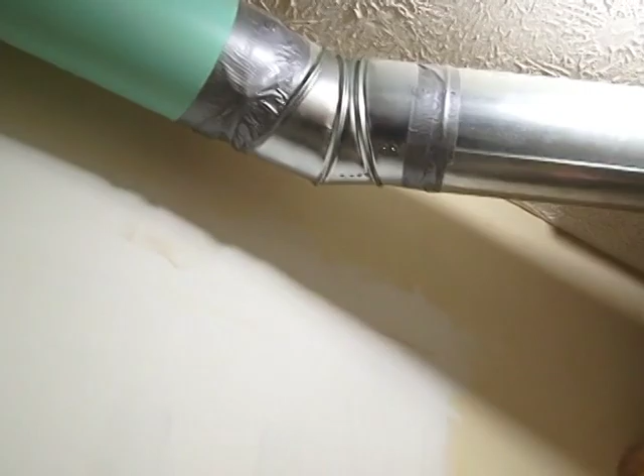When I purchased this house, it had an electric forced air heat, and it was using an extreme amount of electricity, and I just felt this wasn't consistent with the way I wanted to live. We have removed the air conditioning, taken that electric furnace out, and we are currently installing a heat air exchange system that will bring air in and exchange the heat and moisture with the air that is exhausted from the exchanger. We're going to have a fresher house than the one across the street, because we're going to make it a point to move the air out, even though some old houses may move 10 times an hour air turnover inside and out because of leaking and bad windows and doors. We're going to establish our own, and we're not going to lose the heat when we exchange it.

Although Ward's home no longer needs a furnace, he uses a small mini-split heat pump for heating and cooling. It will only be necessary under the most cold, extreme conditions. Ward's whole house retrofit resulted in an 80% reduction in heating energy use.

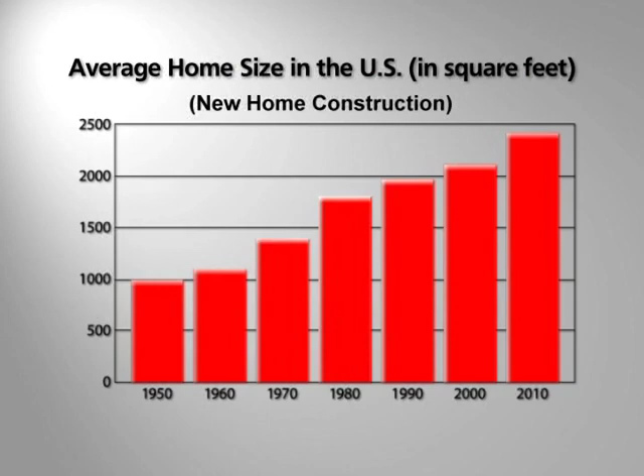There's lots of technical issues around energy, but when we start talking about size, we're looking at the social aspects, the cultural aspects of energy. Newly built houses tend to have a much higher amount of square footage per person, and they also tend to use far more electricity than their older counterparts. From 1950 to 2010, the average house size in the United States more than doubled. During the same period, the average number of people per home declined. The result is that the average square foot per person has increased more than 3 times, from about 300 to about 950.

The greatest potential we have in America is for people to reevaluate what they need and make decisions regarding how many additional people might be able to live in their house, or could they live in a smaller part of their house. The potential for co-housing on an existing neighborhood basis. The power of community as an incredible resource to compensate for lack of money and lack of resources that you might be able to invest in an individual house.

Nancy Darren and 2 other women have chosen to reduce their energy consumption and CO2 emissions by sharing living space. Nancy Darren is a woman who's been involved in energy and social actions a good part of her life. And she decided, as she moved towards retirement, rather than just remain in her big house, she recruited other women who were nearing retirement and living in large homes to downsize.

They have 3 apartments in separate areas, bedrooms, living rooms, but they share the common facilities such as laundry and kitchen. We decided to remodel a house that we could each have a different area. Between the 3 of us, we reduced our footprint by 1,500 square feet. If I give up a little bit of what I'm used to in my habits of having a whole house to myself, I can share expenses and share responsibilities to where there's more time to just sit and visit or to be engaged in my community.

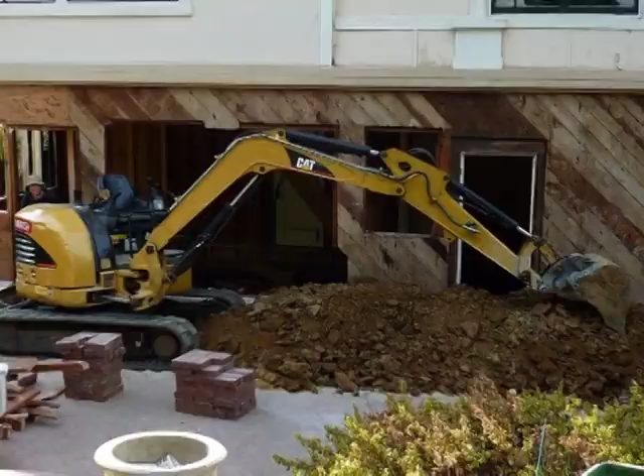One of the projects I think is really pretty innovative, located in the Bay Area of California. What they chose to do is create a comfort zone within the kitchen and basically renovate the kitchen walls, let the rest of the house float in terms of temperature. They still sleep in the rest of the house. They couldn't have afforded to address the entire exterior skin of their house. And that gives them deep reductions without as much deep debt.

Without heat, the temperature in the warm room floats between 60 and 65 degrees. They only heat the rest of the house on a few special occasions. If we embrace the fact we've got to transform how we use energy, there are a variety of ways to figure out how to get there.

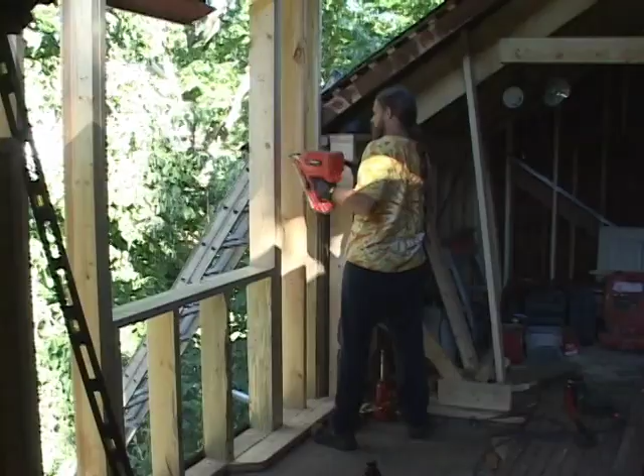If you look only at energy, then we can go on a few more decades until the energy runs out. But when you look at CO2, we cannot afford to burn the energy that's in the ground. So it's gone from a matter of convenience to a matter of survival. To build a new power plant, it costs 5 times more than to retrofit houses to Passivhaus standard. It's what Amory Lovins said in the 80s. If you're willing to really cut your energy consumption, then all solutions become much easier and much more possible.

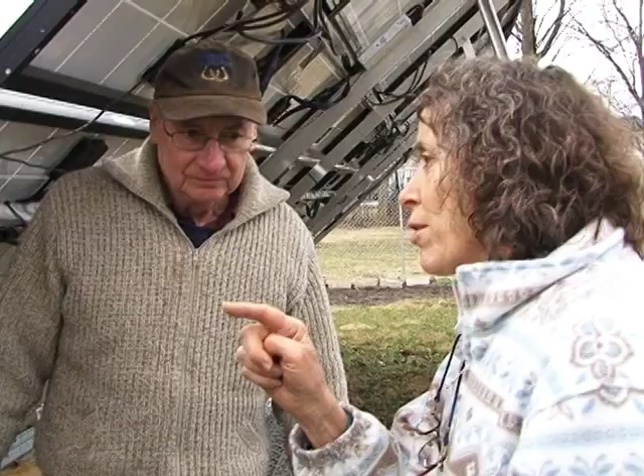If you actually achieve a 90% reduction from standard construction in your house, and then you want to use renewables of solar or wind, it takes a lot less. So if the first concentration is on energy reduction, then whatever solution you have to do through technology is smaller. If you aim for a 90% reduction of energy use and you get to 80%, we're a lot better off than if you don't try for it at all.

I really like this, you know, some people get excited about looking at their fancy car. I get excited about looking at this energy data and how little energy I'm using the way I live comfortably. But I think it's a beautiful, profound thing to have a building that's really serving you with such a tiny, tiny amount of energy. And I hope that people can really get a grip on how good that would be for them, and obviously how good it would be for the other issues that we're encountering in this world: war, peak oil, pollution, global warming. It, in one fell swoop, helps with all of those problems.

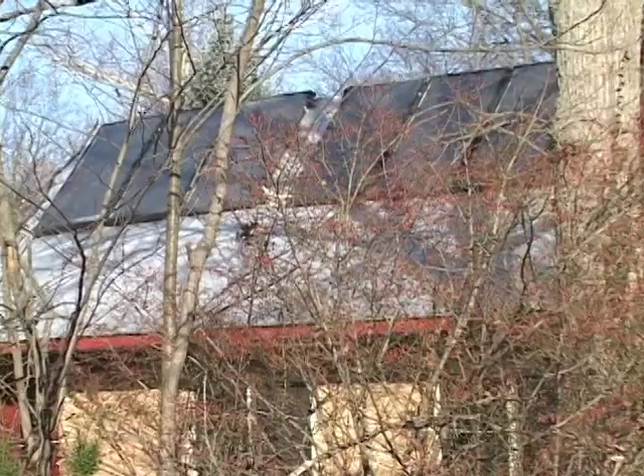It's a development of a kind of liberation, because now you can build your energy future. You do not depend on the oil, you do not depend on the nuclear energy. You just depend on your own knowledge and your own work, and we have seen that that is possible. I really believe that saved energy is the invisible oil that is in existence everywhere, and everybody can access it. Nobody has to buy it from anybody. Just smart building techniques will access that wealth, the wealth of conserved energy, and anybody can get it.